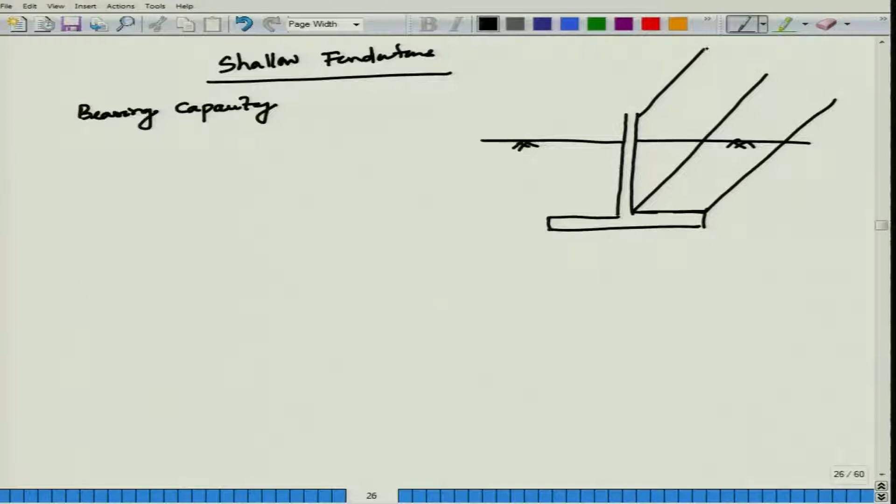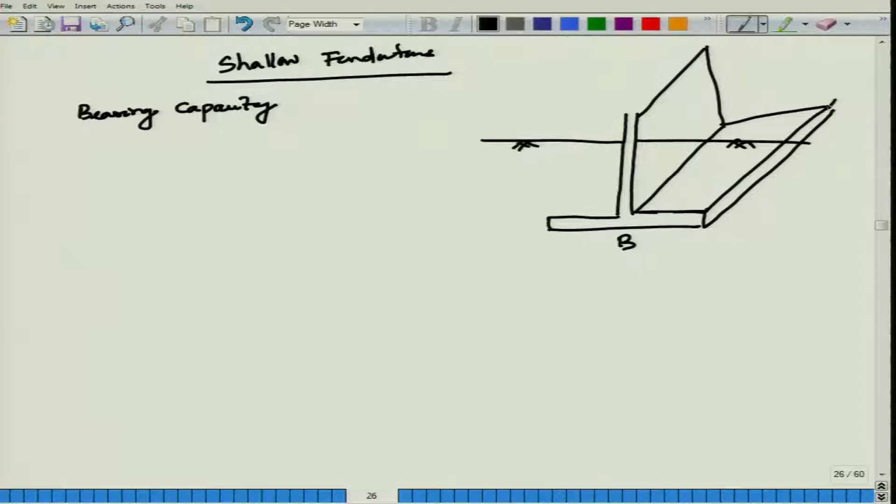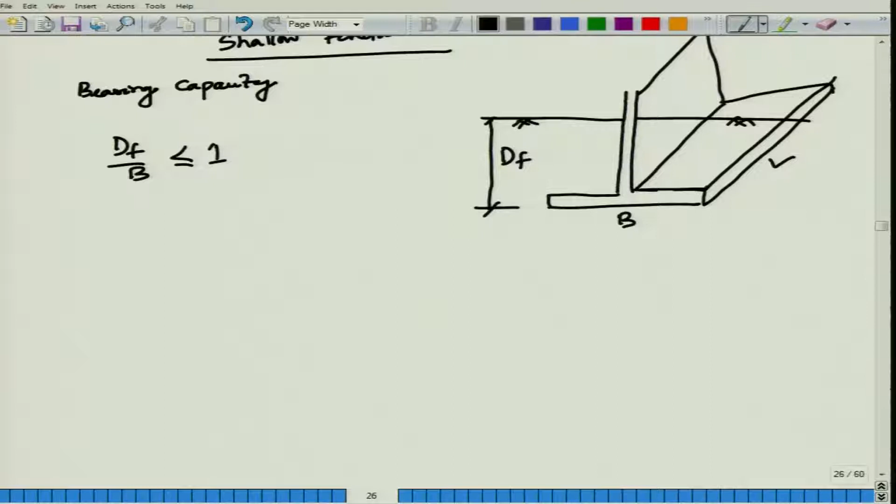This is B, this part is your L, and this is your dF, depth of the foundations. As per Terzaghi, if dF by B is less than or equal to 1, depth of the foundation by width of the foundation less than 1, then you can say it is shallow foundations. Later, after research, it has been categorically changed to dF by B less than or equal to 2 to 3, called your shallow foundations.

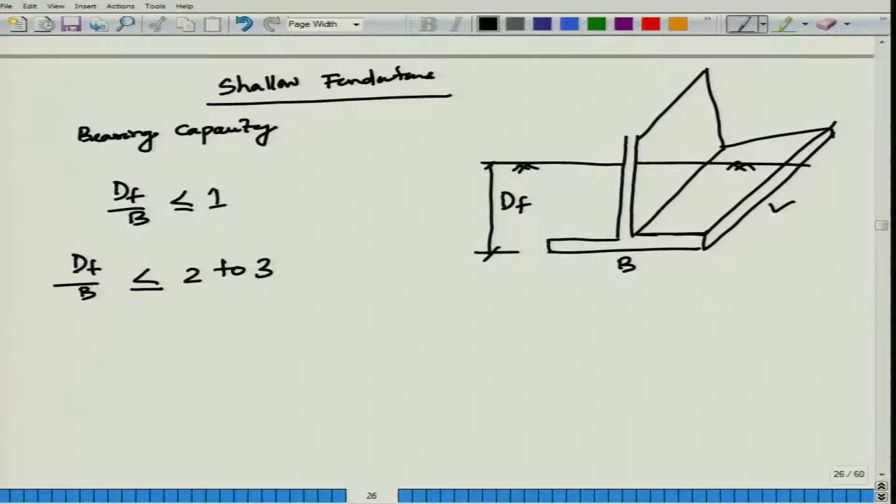If I divide into shallow foundation and deep foundations, what is the criteria? If dF by B, depth of your foundation by width of your footing, is less than or equal to 2 to 3, then we can categorize as shallow foundations, and if it is not, then it will be deep foundations.

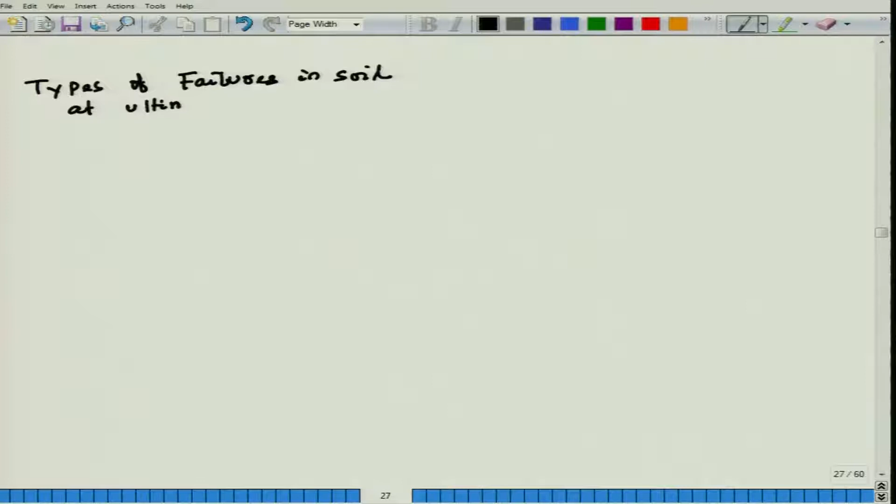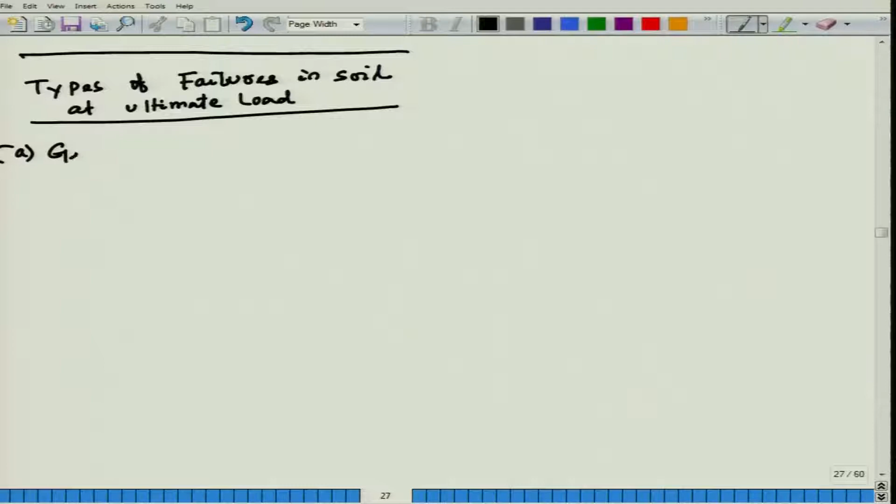Now, types of failures in soil at ultimate load. If I can put it into 3 categories: one is A, general shear failure; B, local shear failure; and C is your punching shear failure.

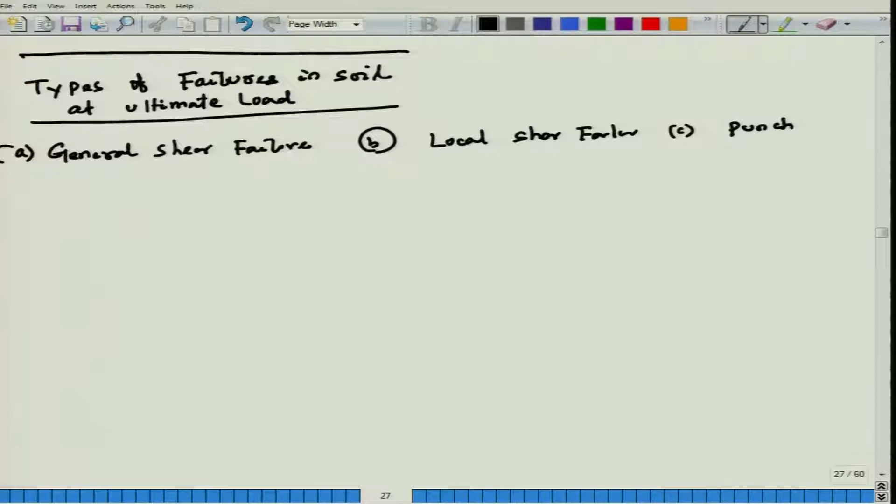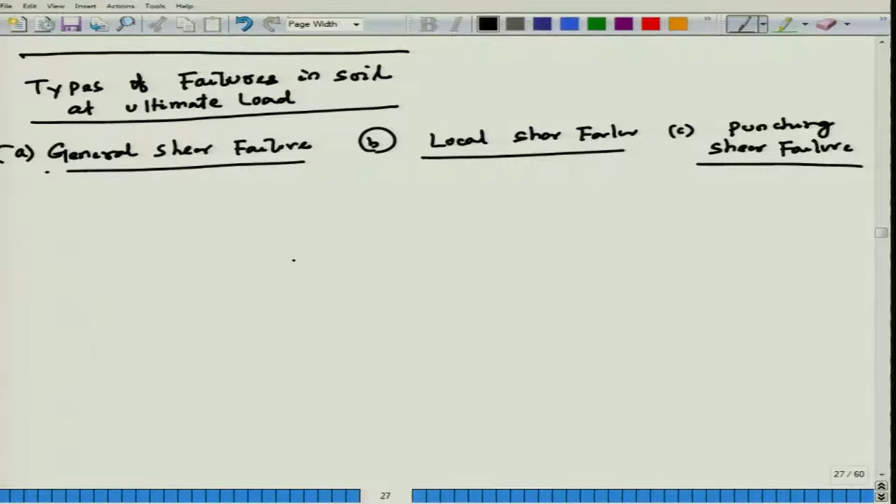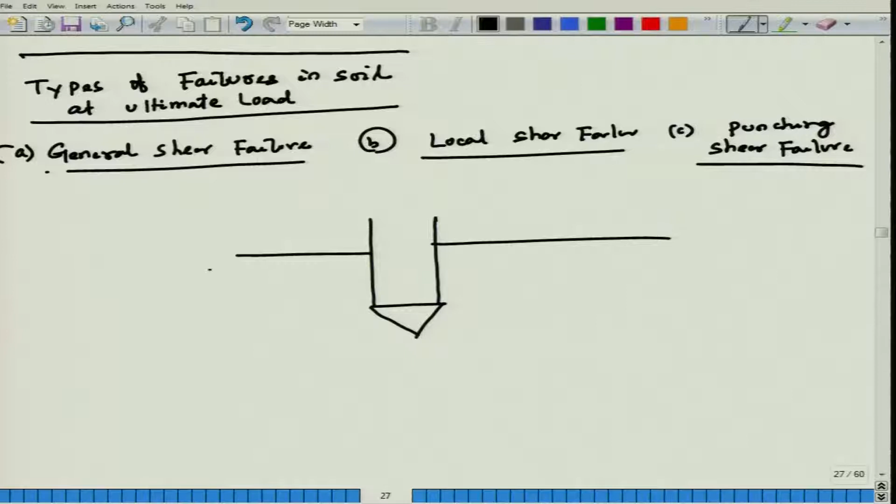So, what is your general shear failure, local shear failure, and punching shear failure? I have to draw just from the general shear failure, a bigger one. I am talking about general shear failure.

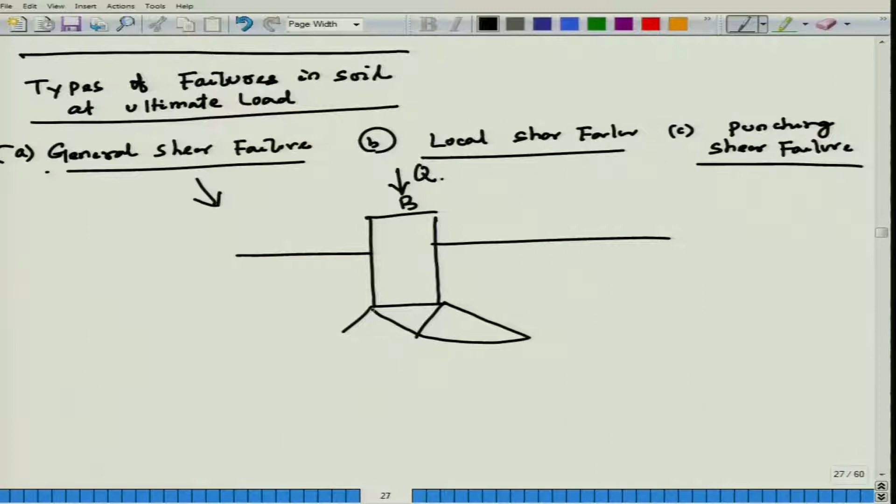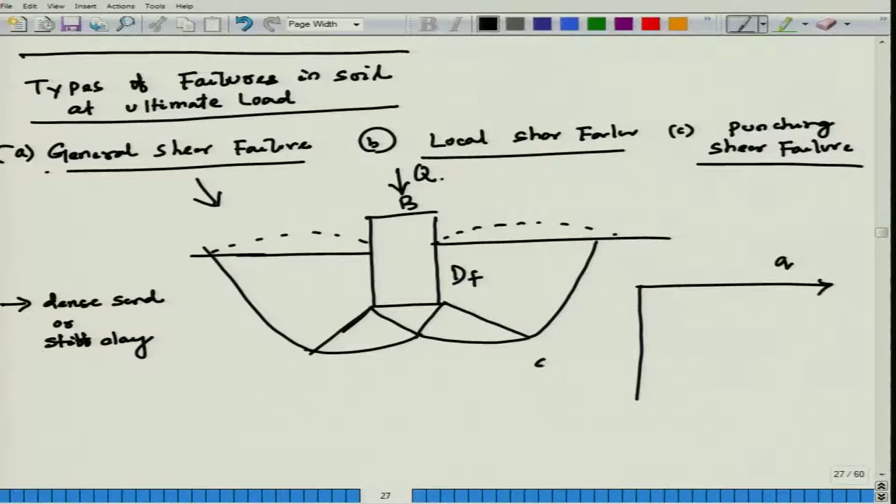Depth of your foundations. So particularly general shear failure, foundation supported on a dense sand, or stiff clay. In that case, it is expected you are supposed to get general shear failure. In general shear failure, if I draw load versus, or load intensity Q versus your settlement, definitely we will get a peak. A distinguished failure mode we are supposed to get in case of your general shear failure.

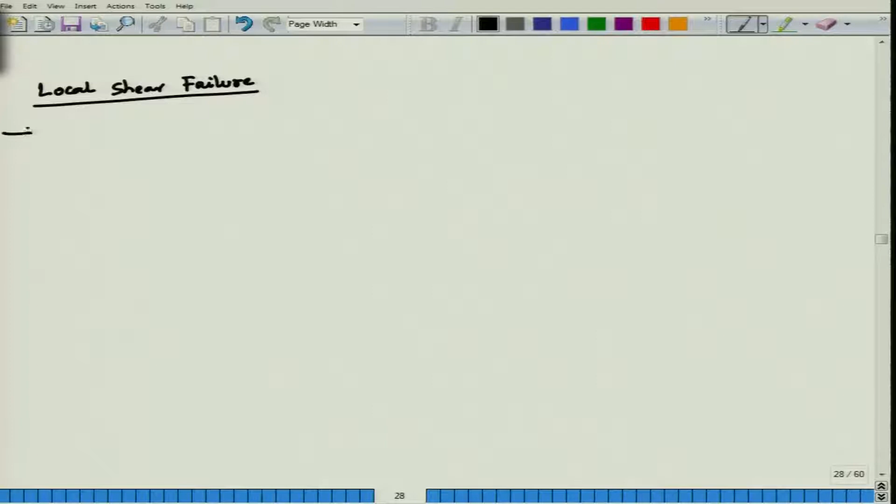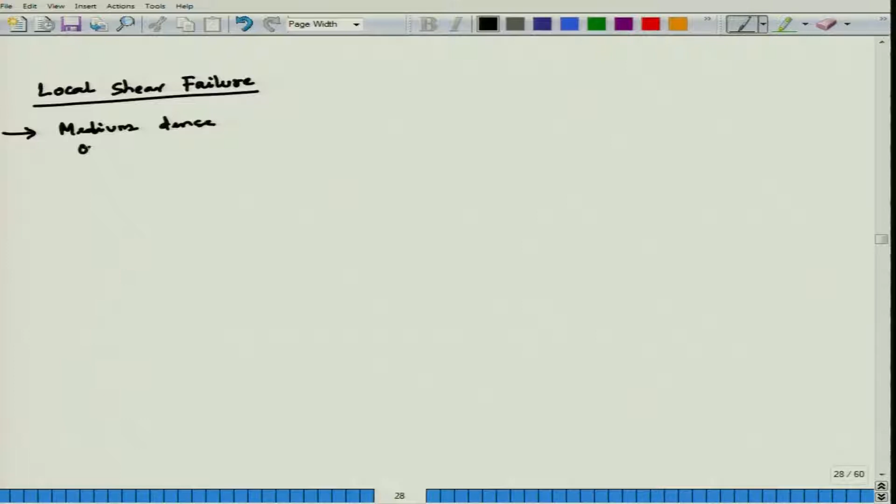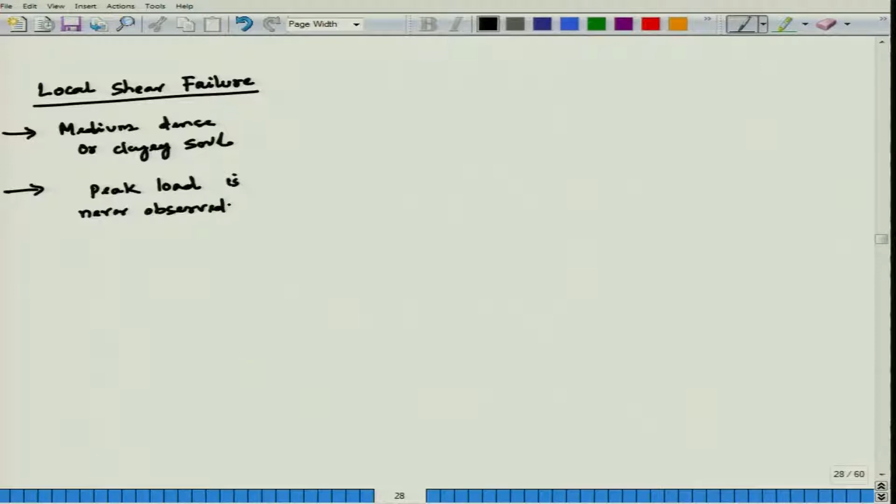So now come to your local shear. In local shear failure, generally if foundation is supported by medium dense or clayey soil, in that case we can expect local shear failure. So in that case, peak load is never observed. If I draw load versus, or load intensity Q versus settlement, I am supposed to get this kind of load versus settlement curve.

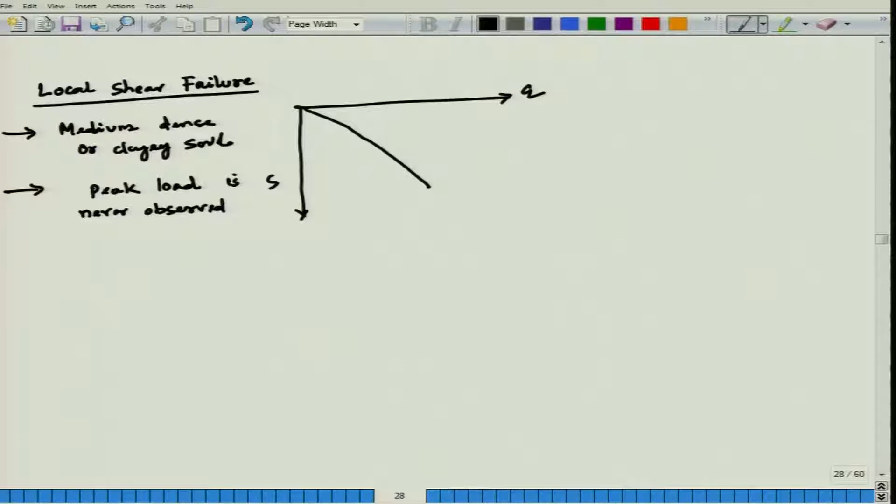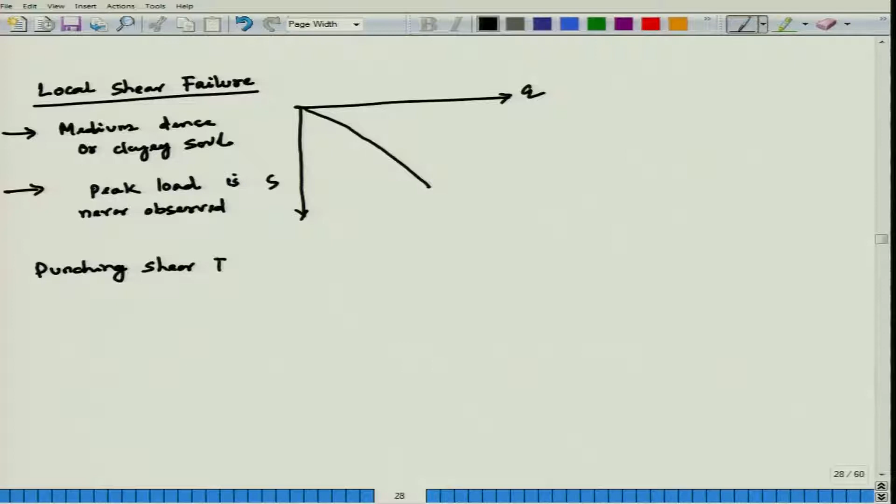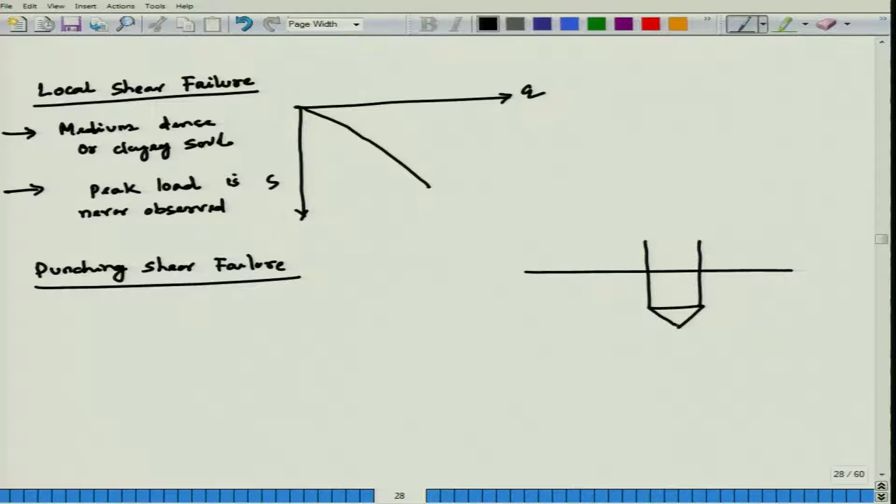Now come to your punching shear failure. In punching shear failure, let me draw it. This is your footing, this is your Q, and this is your depth of the foundations. This kind of load settlement, load per unit area or pressure intensity Q versus settlement, you are supposed to get it.

In what kind of foundation soil are you expecting a punching shear failure? Particularly in case of loose sand or soft clay. Then it has been, in case of punching shear failure, as its name is punching, it will go inside, the foundation will go inside, particularly inside the soil bed.

So another classification has been given for local shear failure as well as general shear failure. That has been given by Vesic, he has given a certain criteria, I will explain it. Particularly as per Vesic's criteria: it is general, and second one is your local shear failure. So particularly for general shear failure and local shear failure, if I put it here, general and local, how do I distinguish?

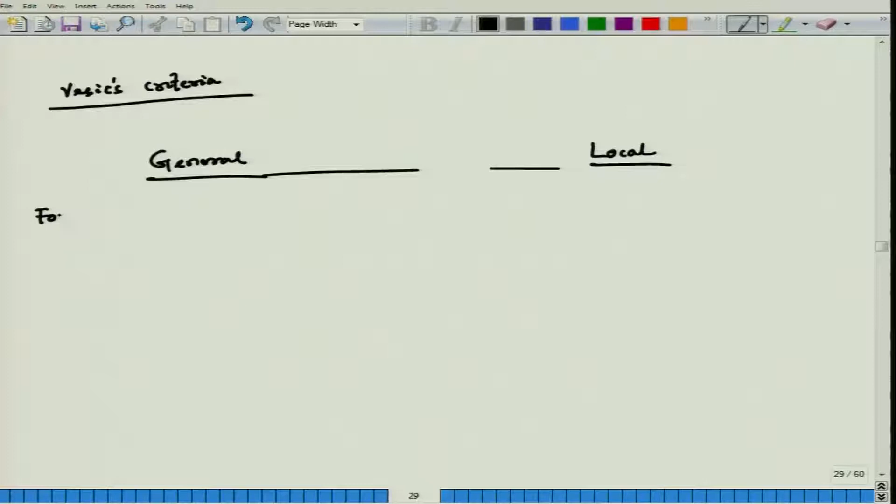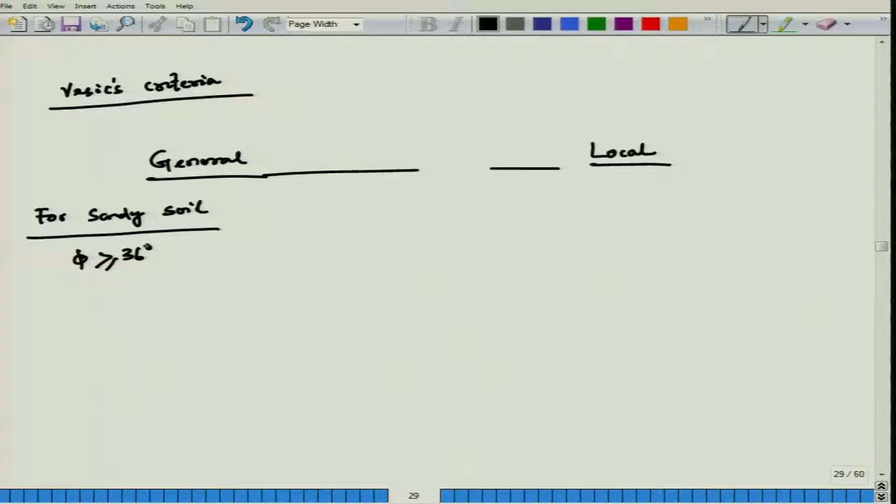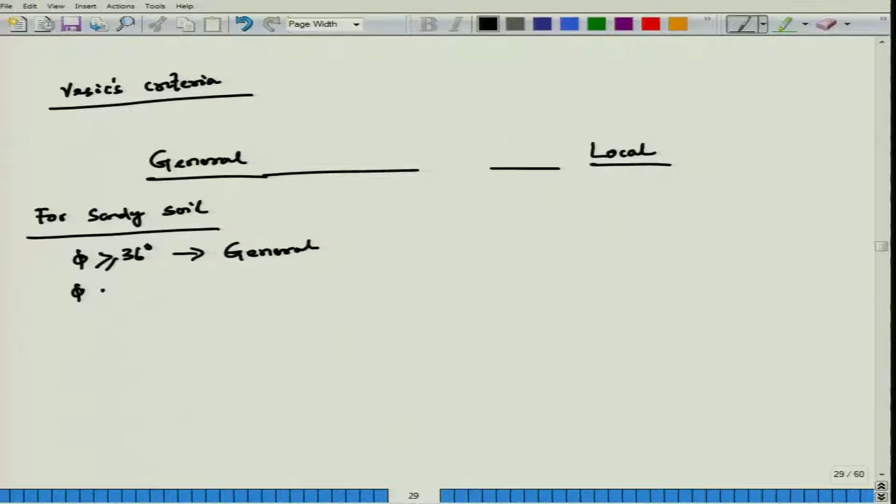For sandy soils, if phi value is greater than or equal to 36 degrees, generally it is general shear failure. Phi less than or equal to 28 degrees, that is your local shear failure. So intermediate values will be interpolated. Now it is general and local; in between, what is the condition? If phi is greater than or equal to 36 degrees, it is general shear failure. Phi less than or equal to 28 degrees, it is local shear failure.

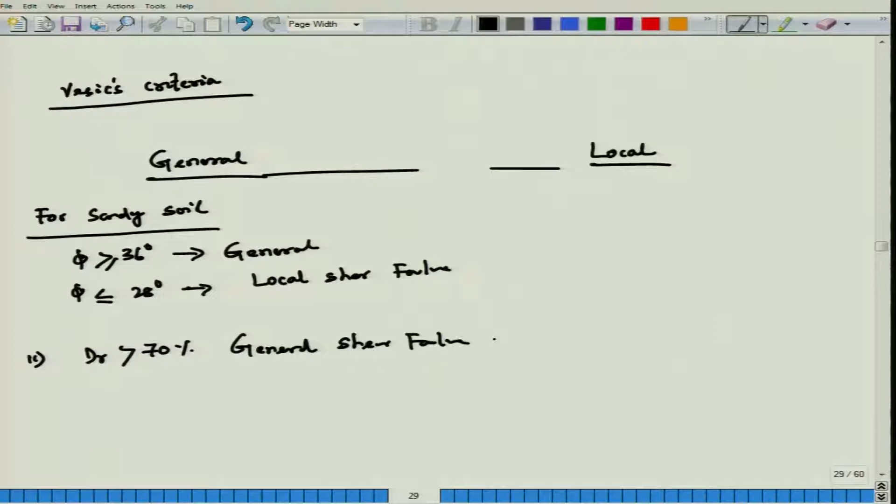Another case, second case is: if relative density is greater than 70%, in that case we say it is general shear failure. If relative density is less than 30%, it is called local shear failure.

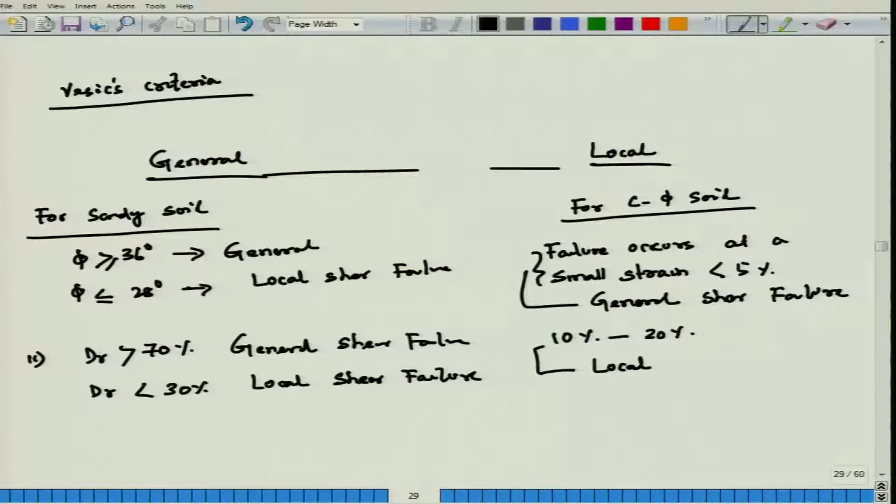So for c-phi soil, it is particularly sandy soil. For c-phi soil, in general shear failure, soil specimen or failure occurs at a small strain less than 5%; this is your general shear failure. For local shear failure it is 10% to 20%, then in that case it is local shear failure.

Now let me summarize the types of failures in soil at ultimate load, particularly required for your foundations. Category one is general shear failure, second is local shear failure, third is punching shear failure.

In general shear failure, this generally occurs if the foundation soil is dense sand or stiff clay. In that case, you get a failure where the load versus settlement diagram shows a peak that increases and then decreases, so you can easily find the ultimate bearing capacity. Another indication is that heave is generally observed around the periphery of the foundation. These are all the conditions or criteria for general shear failure.

Now come to local shear failure. This generally happens if the foundation soil is medium dense sand or clay soils, and in the load versus settlement curve, a peak never happens. Settlement simply increases with increase in load.

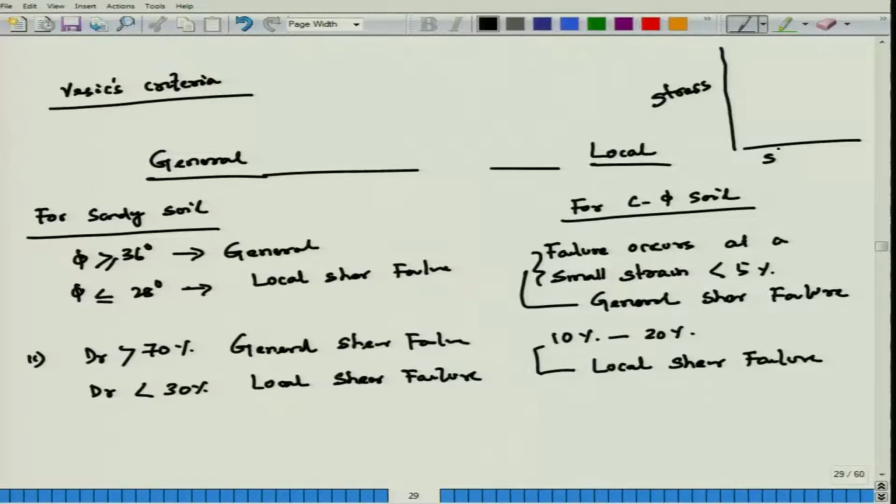For cohesive soil, generally failure occurs at a small strain less than 5%. How do you know that? Suppose you are doing a triaxial test on cohesive soil, plotting stress versus strain. In that case, you get a peak, and that is termed as failure, and the strain should be less than 5%. In that case also you can say general shear failure has happened.

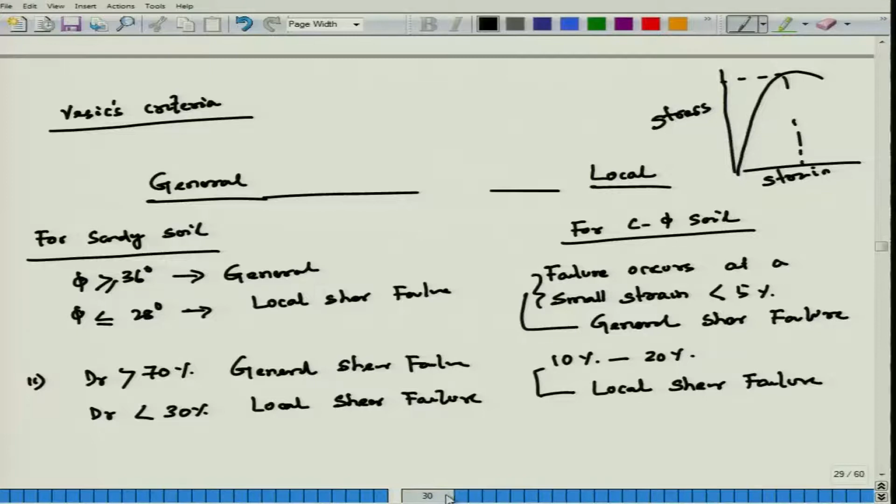If strain at failure for the soil varies from 10 to 20%, this case is called local shear failure. Now let us start with the bearing capacity of shallow foundation.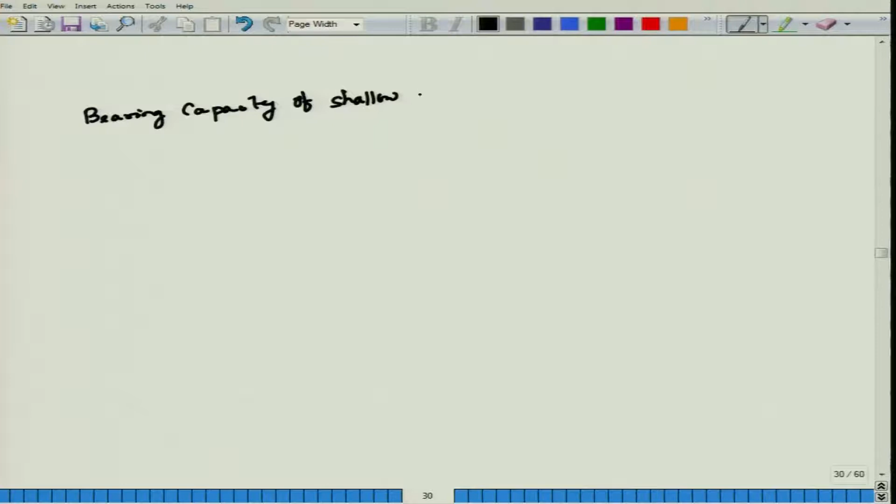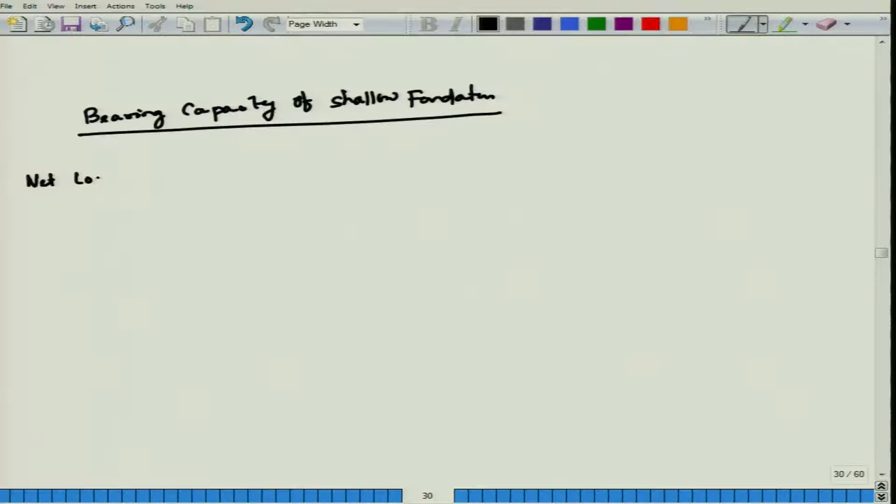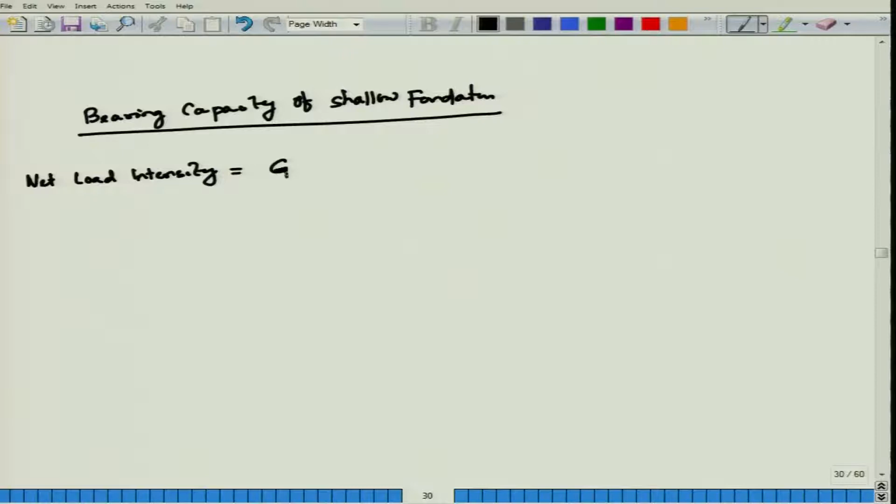So there are different terminologies before you go for Terzaghi's bearing capacity theory. First is net load intensity, which is equal to gross pressure minus overburden pressure. Overburden pressure means gamma d_f, the overburden pressure at the base of the footing.

Most importantly, the terminology I am saying now will be uttered very often while designing these foundations: ultimate bearing capacity, net ultimate bearing capacity, net safe bearing capacity, gross safe bearing capacity. This should be in your mind so that once I say these terms, you can easily catch them.

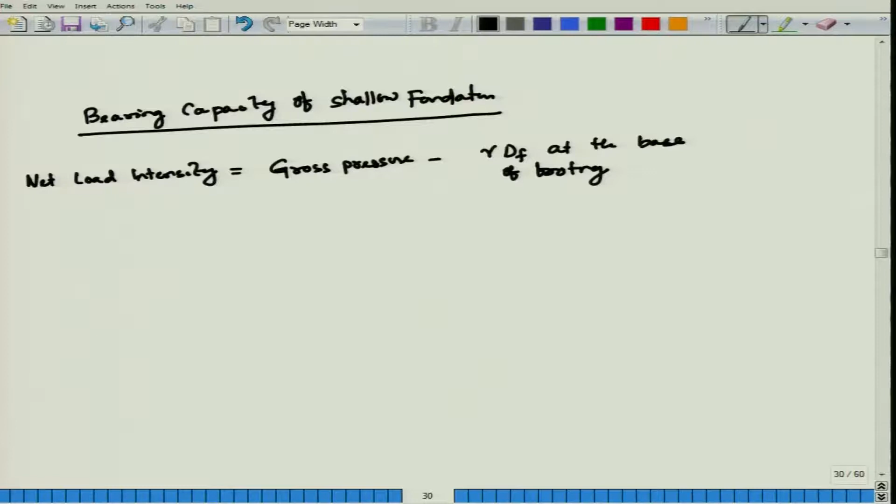So the first term is ultimate bearing capacity. The definition is the maximum gross intensity of load that the soil can support before it fails in shear - by means of shear only. The notation is QU. If I say ultimate bearing capacity of the foundation or footing, this is what it means.

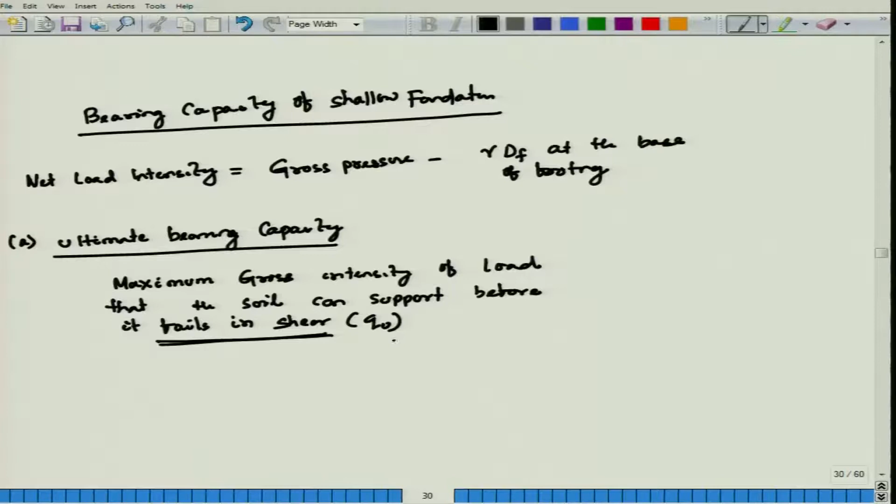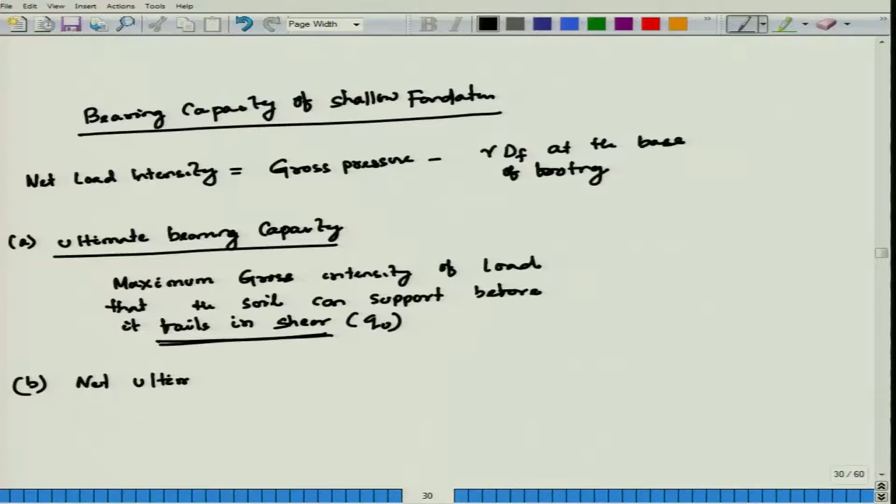The terminology is Q subscript U. Next is net ultimate bearing capacity, QNU, which is equal to QU minus gamma d_f. This is the maximum net intensity of load that the soil can support before it fails in shear - that is, QU ultimate bearing capacity minus gamma d_f, where gamma d_f is the overburden pressure up to the foundation level.

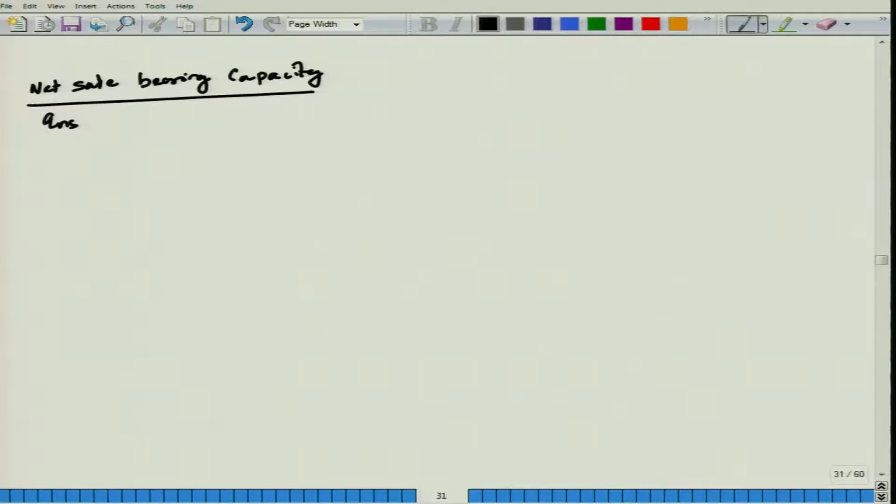QNU is your net ultimate bearing capacity with a factor of safety, divided by your factor of safety. This factor of safety for shear is generally taken as 2.5 to 3 for foundations. So net safe bearing capacity is your net ultimate bearing capacity divided by your factor of safety, and factor of safety varies from 2.5 to 3.

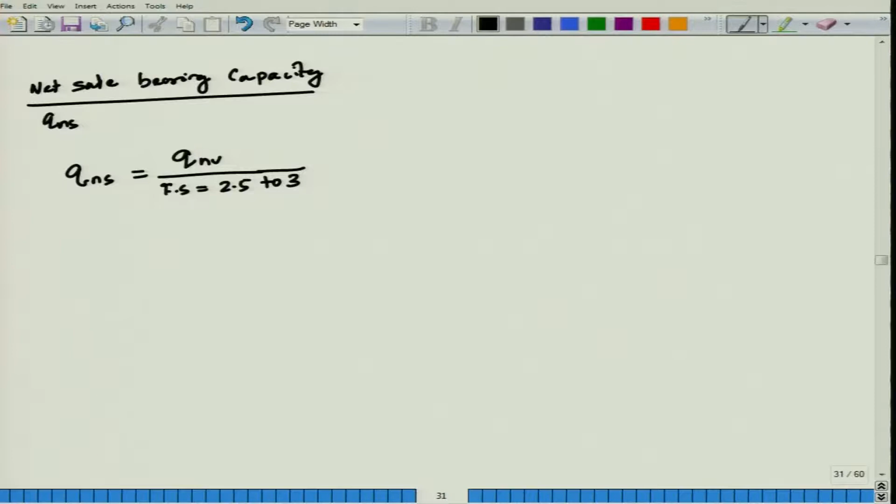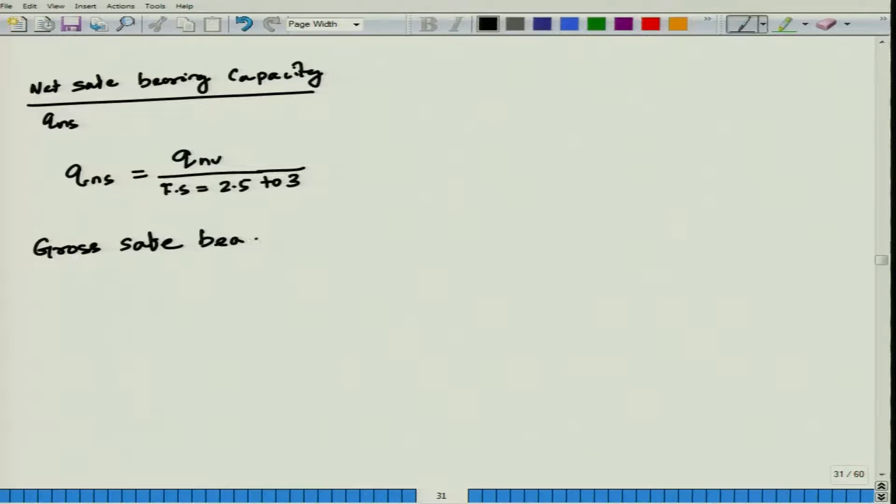Now, gross safe bearing capacity. If net safe bearing capacity is written, gross safe bearing capacity equals net safe bearing capacity plus gamma df, this is your overburden, which is equal to net ultimate bearing capacity divided by your factor of safety plus gamma df. This is your gross safe bearing capacity.

Next, net safe settlement pressure, which is equal to QNP. Small q, N for net subscript, then P is your pressure. So, net safe settlement pressure.

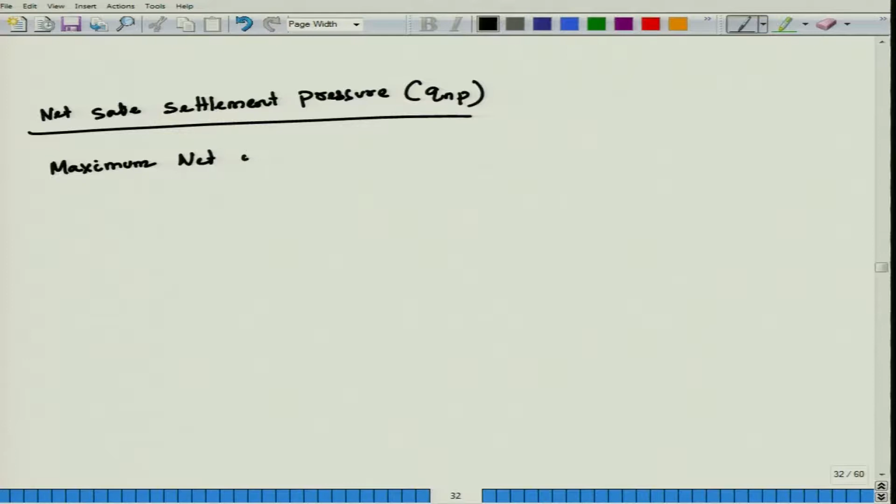So, what does it mean, net safe settlement pressure? Maximum net intensity of loading that can be allowed on the soil without exceeding the permissible or allowable settlement.

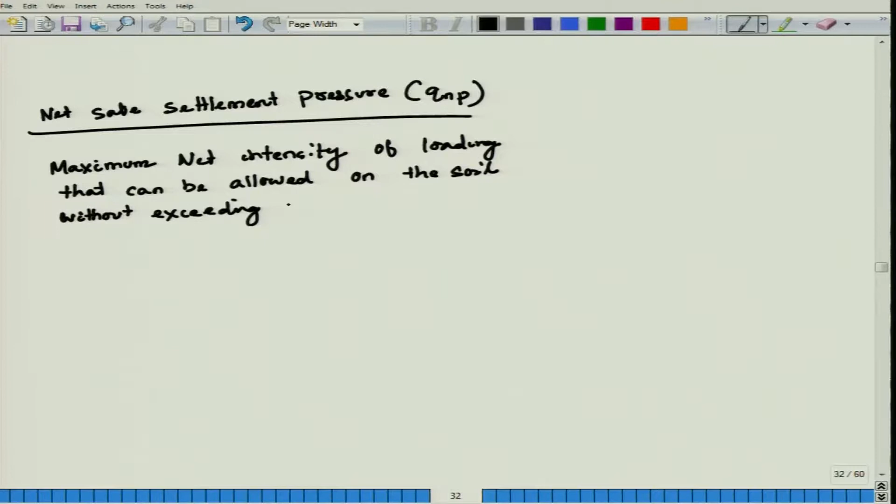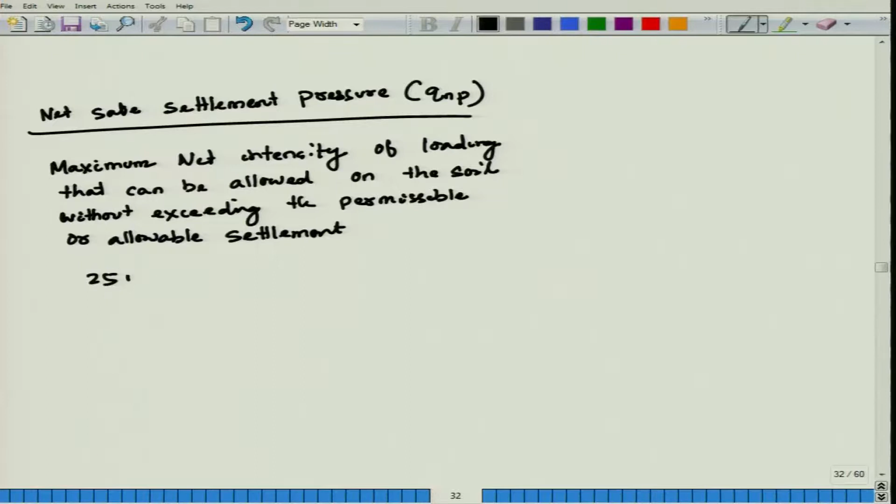Generally, for individual footings, the permissible settlement varies between 25 mm to 40 mm as per Bureau of Indian Standard.

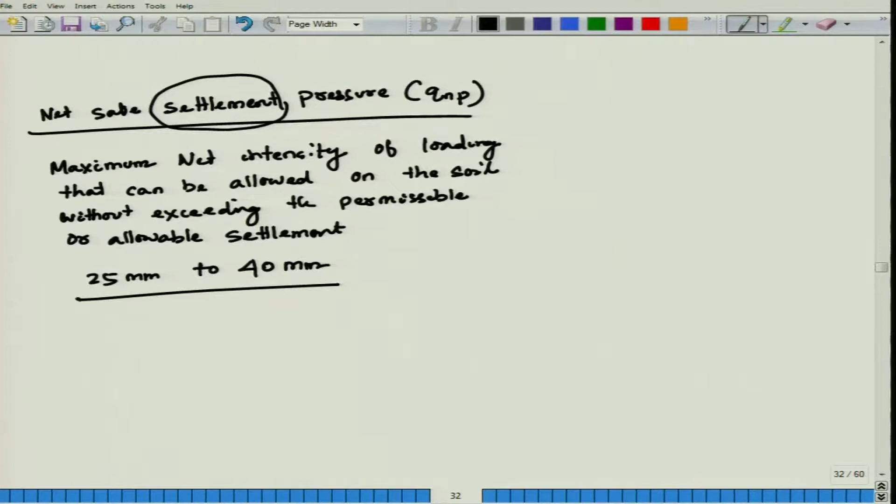Look at here, net safe settlement pressure. It is the maximum net intensity of loading that can be allowed on the soil without exceeding the permissible or allowable settlement. If I draw load versus settlement...

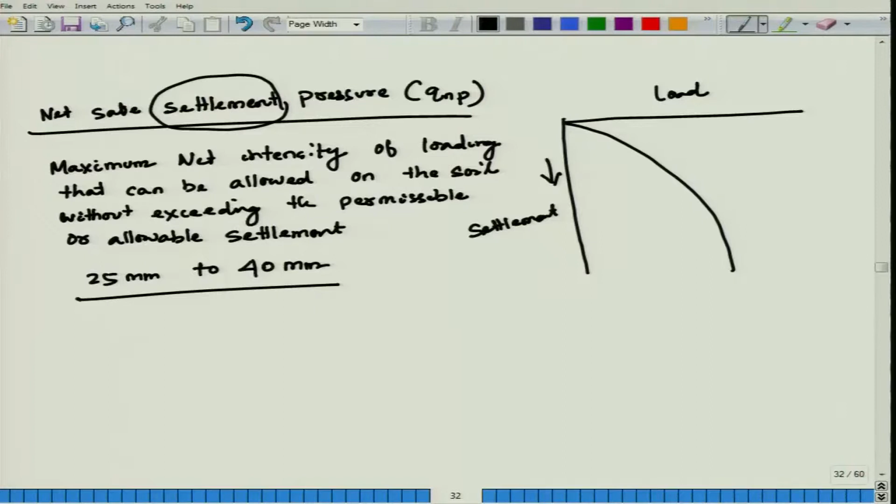Or maybe pressure intensity versus your settlement, generally settlement in mm. So, what is your allowable settlement? If this is my load versus settlement curve, what is the permissible or allowable settlement? Let us say 25 mm, you draw it. Corresponding to that load, you can say that is the maximum load intensity that is allowed on the soil considering your allowable settlement of 25 mm.

That is why it is called net safe settlement pressure. Then another one is your net allowable bearing pressure.

QNP, net safe settlement pressure, net allowable bearing pressure. So, we can write it Qn allowable, N for net allowable.

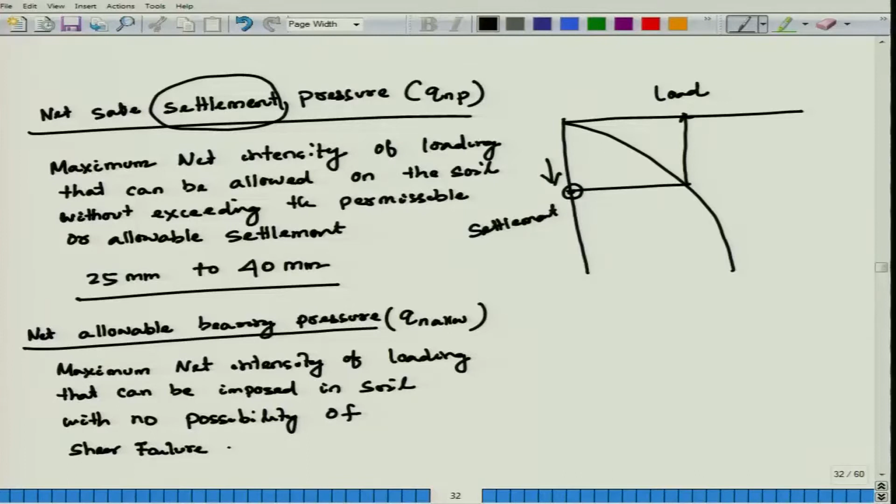So, particularly, maximum net intensity of loading that can be imposed in soil with no possibility of shear failure or excess settlement.

So, if I write it, bearing pressure in that case: first, net safe bearing capacity; second, net safe settlement pressure.

So, out of this, comparing both, the smallest one is considered as net allowable bearing pressure.

So, net allowable bearing pressure, what does it mean? Maximum net intensity of loading that can be imposed in soil with no possibility of shear failure - that means no bearing capacity failure, no net ultimate bearing capacity failure, net safe bearing capacity - or no excess settlement, that means net safe settlement pressure.

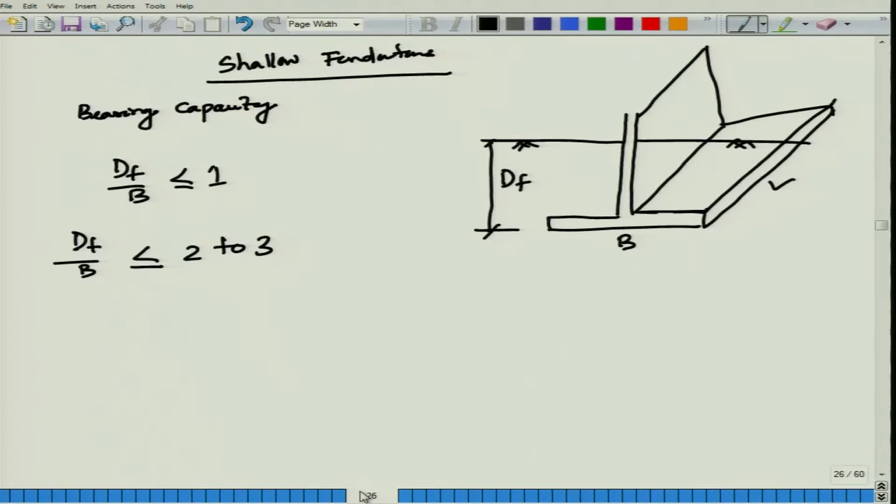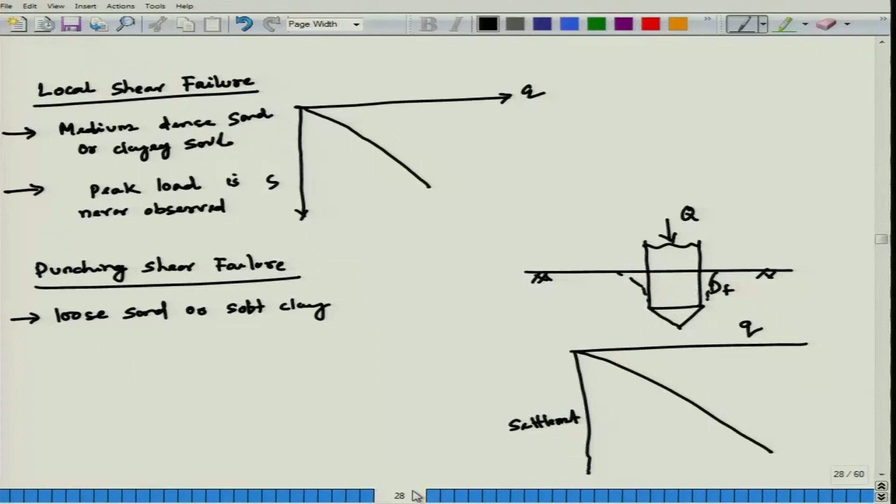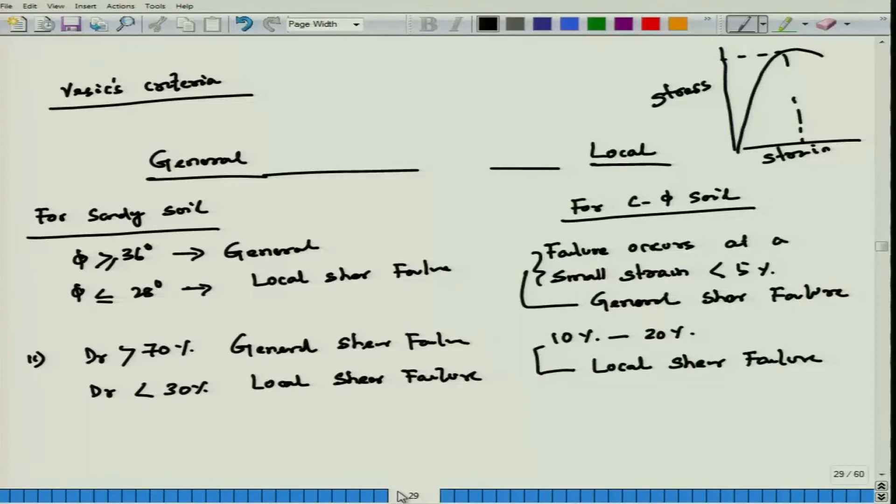So, these are all what we have covered today: shallow foundations criteria, dF by B less than 1, generally given by Terzaghi. Later research changed this, so dF by B between 2 to 3 is called shallow foundation, more than that it is deep foundation. Then what are the different types of failures in soil at ultimate load? General shear failure, local shear failure, as well as punching shear failure. Then Vesic's criteria for general shear failure and local shear failure based on phi value, angle of internal friction of soil, and based on failure criteria, meaning strain rate, small strain or large strain.

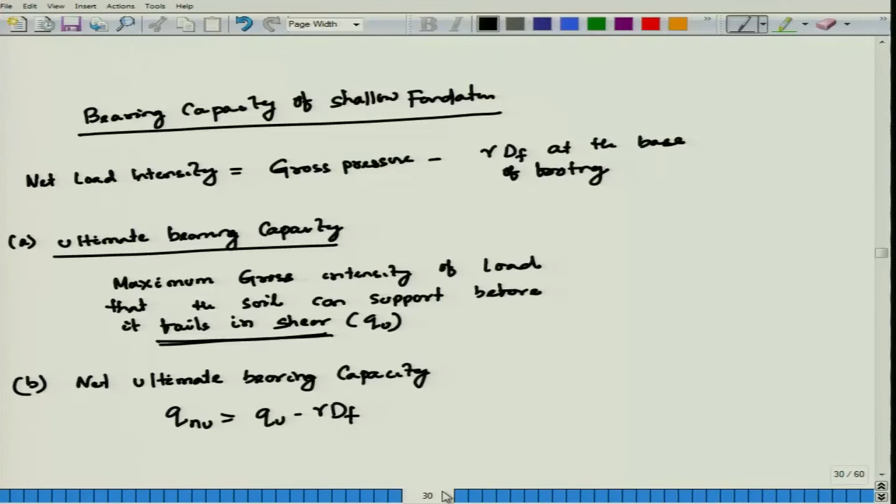Then terminology, definitions, bearing capacity of shallow foundations, net load intensity, ultimate bearing capacity QU, net ultimate bearing capacity QNU, then net safe bearing capacity with a factor of safety 2.5 to 3, gross safe bearing capacity, then net safe settlement pressure QNP, then net allowable bearing pressure Q net allowable.

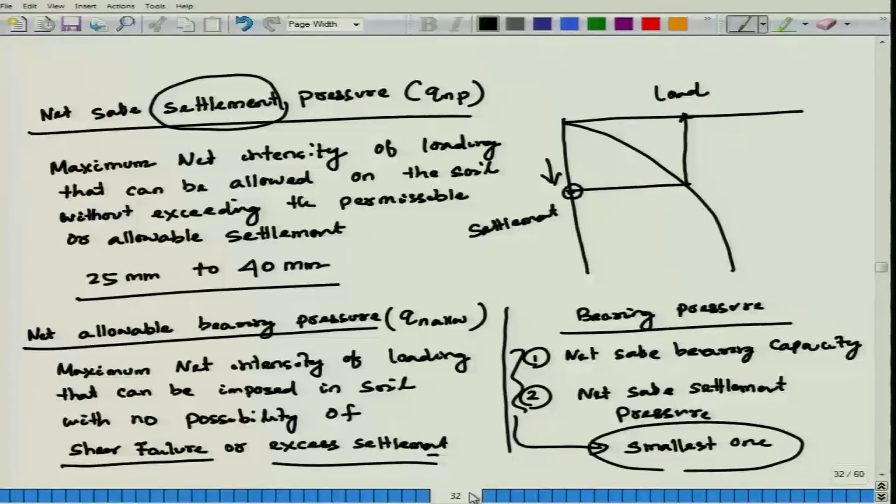I will stop it here. So, next class I will start Terzaghi's bearing capacity theory. This is a basic theory Terzaghi gave for bearing capacity calculations. Once bearing capacity is over, we will go for settlement and different settlement analyses. Then once that is over, we will go for foundation designs, shallow foundations, then deep foundations and other chapters. Thank you.